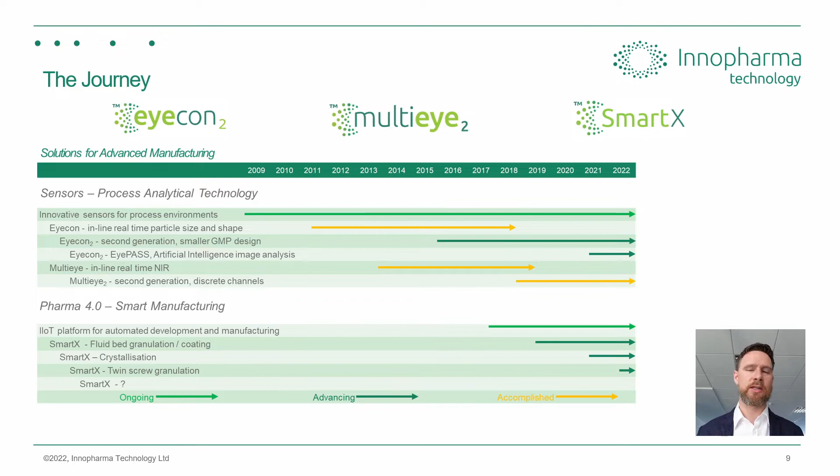So let's go back a little bit and talk about the industrial revolutions, the Viva la Revolution. So we've lived through 4 industrial revolutions. We're currently living in the 4th. The 5th is on the precipice. It's pretty much happening right now. The first industrial revolution can be attributed to things like using steam power. So having power to move objects or manufacturing lines or create goods with steam. So it was revolutionary for its time. Everything was created by hand and manual before then.

And then the second industrial revolution is attributed with things like the electric assembly line. Henry Ford has a claim to that. And also Henry Ford has a claim to bringing in the 5-day work week. So thank you for that, Henry Ford. And then the third industrial revolution, which we've lived through, is the computer era, automation with computers, etc., and bringing in that digital technology. The 4th industrial revolution is what we're living in now.

We're all familiar with a lot of pillars around Industry 4.0, such as cyber-physical systems, IIoT, interconnectivity of things really is what Industry 4.0 is all about. We're now at the precipice of Industry 5.0, which is all about sustainability and a human-centric approach to us and technology. And it's probably going to be because of Industry 5.0 that we'll live long enough to see its fruition.

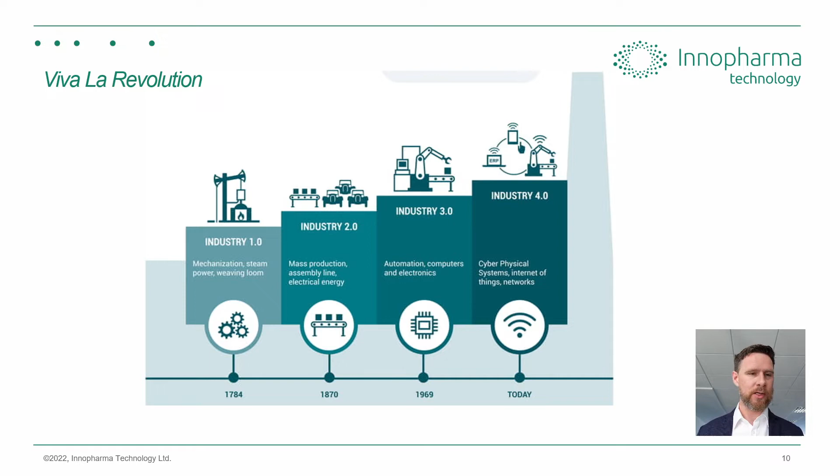And what's interesting as well about these timelines of the industrial revolutions is you'll notice here at the bottom that pretty much a Moore's law is being applied every time we have a revolution, meaning the time is getting cut in half. And that's why it's been about 50 years from the 3rd to the 4th industrial revolution, and it's only going to be about 25 years between the 4th and the 5th industrial revolution. So that's why we have the privilege of living through 3 industrial revolutions. Okay, so that's a little bit of background and color about industrial revolutions.

If we stick with Industry 4.0, which we're very heavily embedded in now, these are all pillars around what Industry 4.0 is, and I'm sure we're all familiar with what these are. Cybersecurity is in our everyday lives, automation, cloud computing is something we even take for granted now. All our devices are connected to the cloud.

Artificial intelligence, we're seeing more and more every day with things like image analysis and using machine learning, which is an umbrella under artificial intelligence. And it's all about real-time monitoring of this data and machine-to-machine communication more and more. Smart machines talking to smart machines is the idea around Industry 4.0.

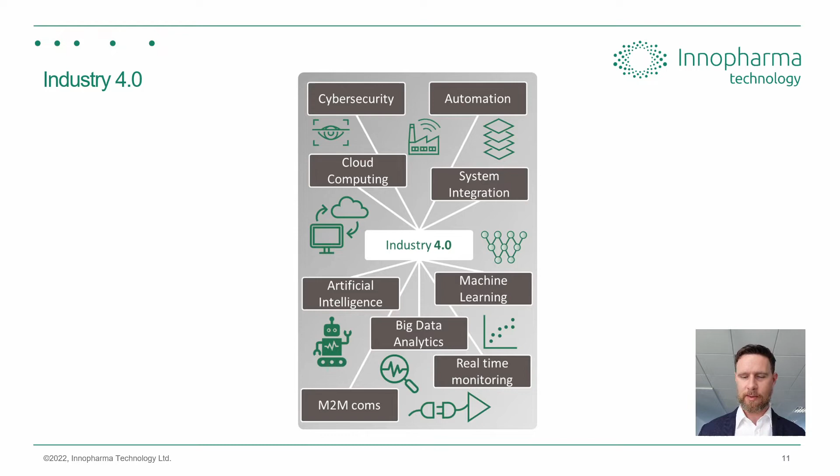So if we jump then into a bit of a regulatory perspective around what it means for the pharmaceutical industry. Pharmaceutical companies cannot sell their end products if they've not been proven to be produced correctly and conform to the standards that have been set out in their submissions. So it's fair to say that they have to reach a certain level of compliance in order to sell these products into the market.

And that's obvious for reasons of the end users being vulnerable and looking for the best products that they can get out there, and to deliver on efficacy, etc. So what that means traditionally is that I reach an X standard, I comply, brilliant, I can sell my products. But there's a lot of things pharmaceutical companies have not been taking into account along that journey, such as efficiency in their process, or making their processes smarter to learn about them. It's more recipe driven, put X in, get Y out, for example.

While the regulators around the world, the FDA and the ICH, have been trying to change this over time and bring in more standards that would give the companies the benefit of using advanced technology to learn more about their processes so they can improve on sustainability, yields, get the product to market quicker, more digitization, less paper for filing, etc. All these things have been happening for years now.

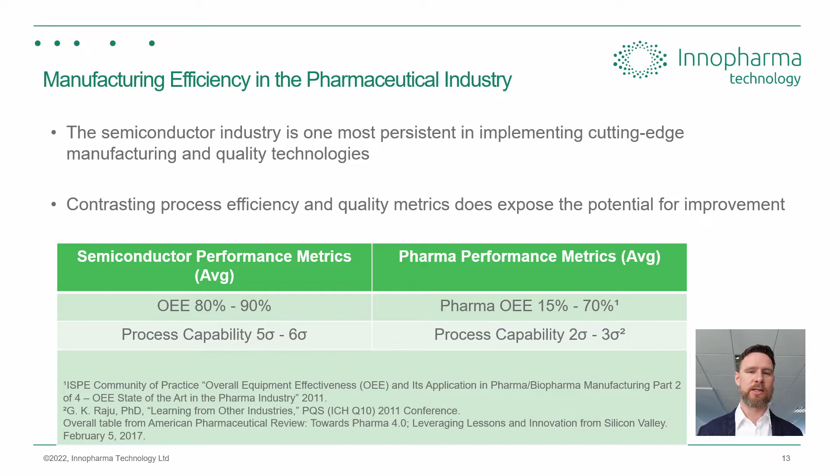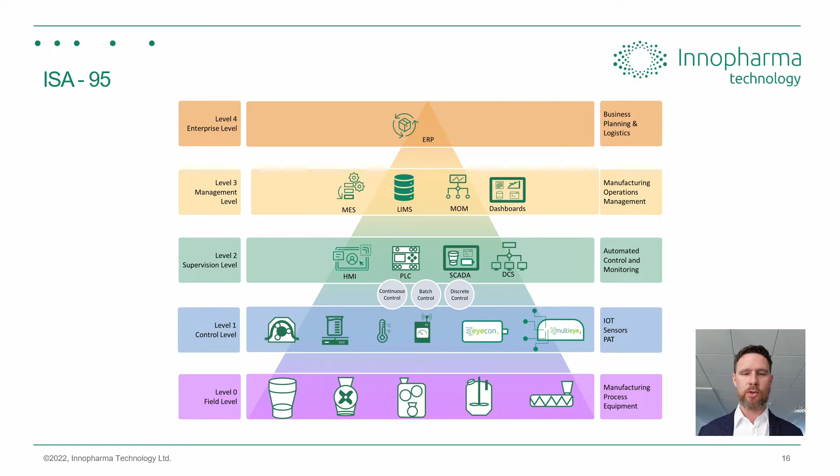Now, some would argue that this is actually a little bit outdated and things have evolved since the creation of ISA 95, and that's fair enough with Industry 4.0, Pharma 4.0, but ISA 95 is still a great reference point for working toward automation and digitalization. So that's why we show it here.

Since the operating model, ISPE has broken it out into working groups. So around the world, we have different working groups working on these different areas to bring Pharma 4.0 into the industry. So there's really good work being done by ISPE and its members.

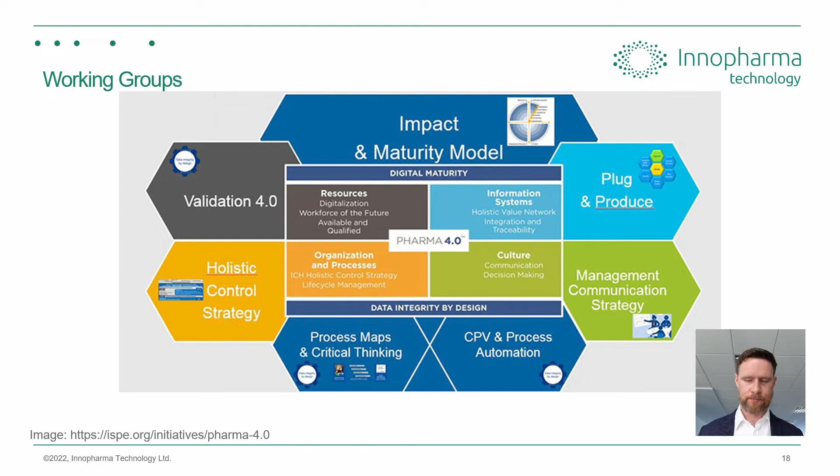and then the different components that make up SmartX and how it takes that data, manages it, and brings it up to the cloud, for example, for visualization. We have a device integration hub, meaning you can bring any sensor you want into it. We also have an advanced dynamic process controller, which is really what's allowing you to do the automation of communicating between devices, making decisions, getting feedback, and tweaking your machines to get the end product that you want.

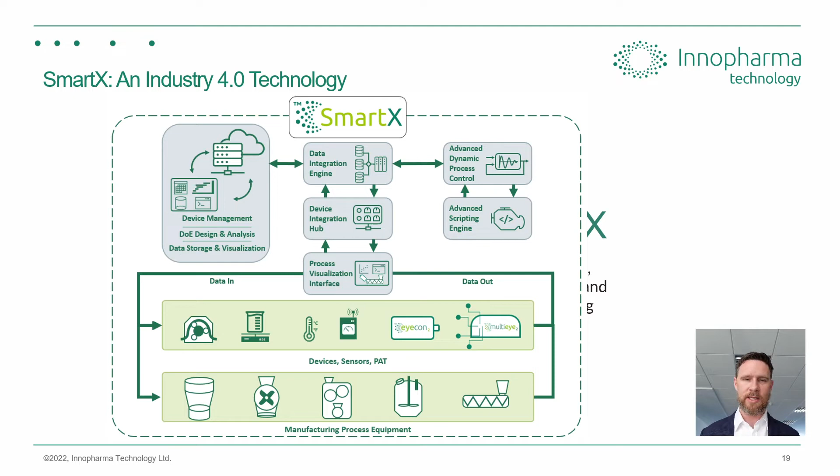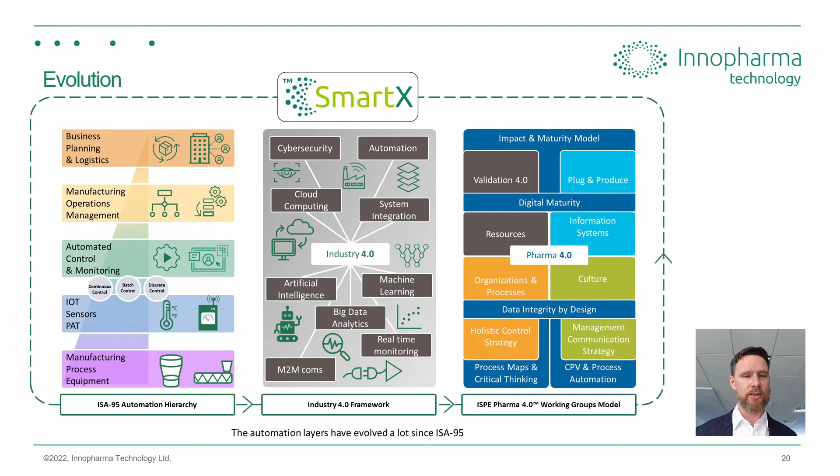So that's a breakdown really of what SmartX is and how it sits into this hierarchical needs of automation and digitization. But then if we look at SmartX again, overall, this product that we offer, how it sits into all these different areas of the ISA 95 automation, Industry 4.0 framework and all its pillars that it touches, as well as the ISPE's Pharma 4.0 working group framework and how it encompasses that as well. So basically we're saying here, it's a suitable technology that has evolved with these types of interpretations of Industry 4.0, Pharma 4.0.

So we get a little bit more granular and look into what actually SmartX is. It's basically a real-time digitization and automation platform that can be installed horizontally into your factory. And what that means really is we'll install servers either locally or remotely, so you can then communicate with your process equipment, with your PAT devices, with your sensors, and amalgamate and unify all that data. It's vendor agnostic, meaning you can bring in any sensor or data that you want.

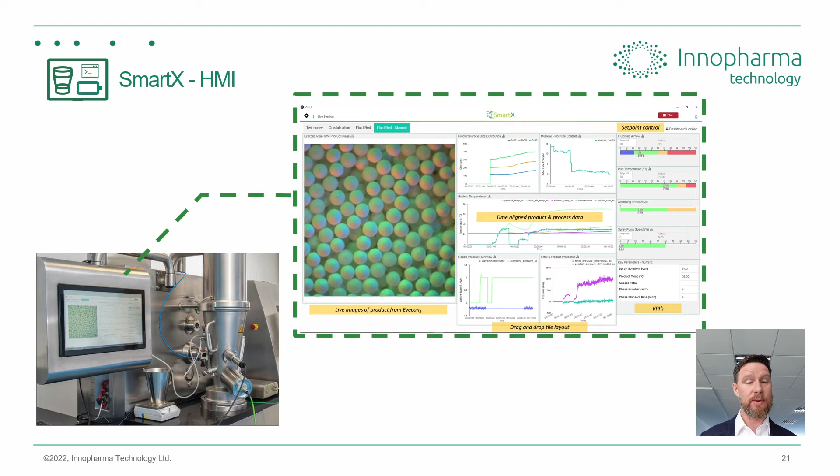But beyond that, SmartX offers things like with the cloud, you can do dashboards, and that allows you to really work as teams and make better decisions about your processes. So you can share the data with your team basically around the world. You could dial into SmartX, look at all this time-aligned data in one location, work with subject matter experts that might be at a different site or consultant, for example, and work in a Teams or Zoom fashion that we're all familiar with today to advance your process development and again get to market quicker. And that's what we're seeing here.

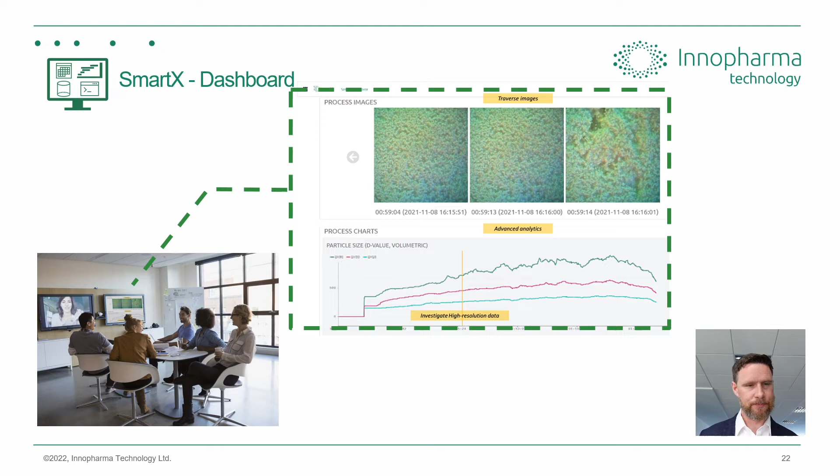Another unique aspect of SmartX is its low-code, no-code capability that's been built in. So it's been designed for the process development environment, working with process scientists who need to know how to actually control their processes, and you need not necessarily be a programmer to interact with a program like SmartX. So what we have here is a type of drag and drop bars and different process steps that can be built in so you can decide what you need to do next with your process. A type of if this then that approach to building out your automation strategy within SmartX for your piece of process equipment with all that extra data from your sensors, for example.

So essentially Pharma 4.0, it's fair to say, it's not just about running the machines and processes and monitoring it or even setting a recipe and walking away. SmartX offers you to basically monitor it as it's running, but tune it as you go as well. So it's a smart process. It's not purely just automation, set it, lights out, walk away. It's using its feedback, it's using controls, giving you more data to make better decisions, and you're tuning your process over time.

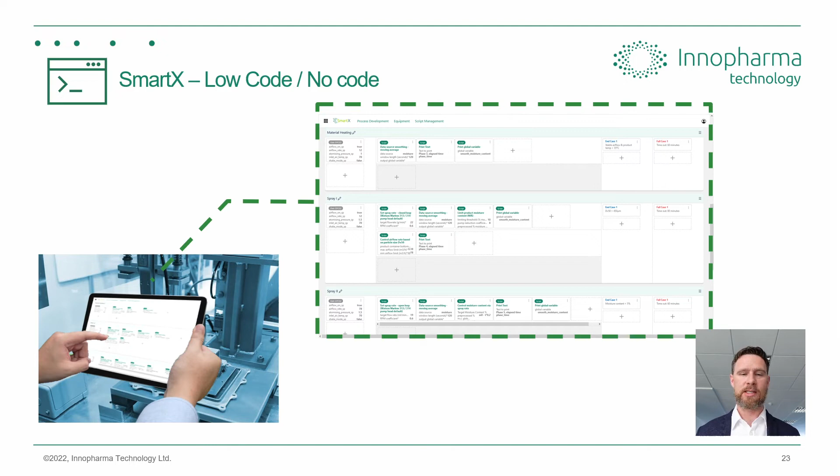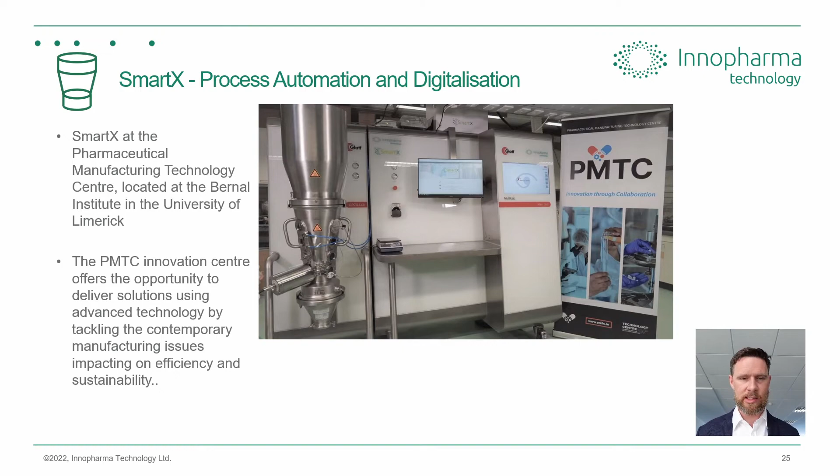This is a Glatt multi-lab machine, but what's been installed horizontally on top of it really is the SmartX, that screen you see in the middle. And it's basically allowing you to control this piece of process equipment, develop your own process steps to automate it, and using all that extra data from some of the sensors we have on this equipment: a particle size analyzer, our Eyecon 2, a MultiEye 2 for moisture content, but not just that, we also have a loss in weight balance that we installed, room temperature sensors, humidity sensors, any really third-party sensor that you want can be brought into this, as well as the process equipment's sensors and technology as well.

So this case study, we looked at fluid bed granulation, the traditional approach. I could talk about fluid bed granulation for an hour, or there's plenty of good talks out there already about it. But I think it's fair to say that the traditional approach to fluid bed in industry is it's a batch process typically. It's recipe driven typically, especially in manufacturing environments where it's basically set it, put X in, set the dials, hopefully Y comes out, test it at the end. If you conform, happy days, move on to your next process. There's little to no real-time inline measuring of any of the CQAs, critical quality attributes, and seeing what effect changing your CPPs, your critical process parameters, have on those CQAs, such as particle size, moisture, whatever your interest is in to get this product to conform.

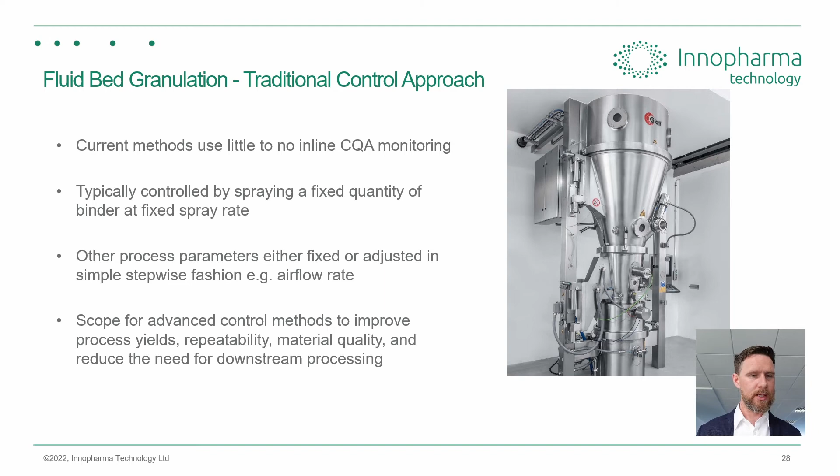So what we did, we used the Advanced Dynamic Process Control, the ADPC aspect of SmartX. That's one of the modules within it, to set all these different process phases. And these are smart process phases, meaning there's a type of if-this-then-that approach to their design. So they can't move on to the next stage unless certain criteria are met, and there's feedback control within these as well.

For example, for the very first phase, we have to preheat a bowl. You continue until your exhaust temperature reaches a certain temperature. Not the product bowl temperature itself, but the exhaust, because then you know the air coming out of it is hot and has unified the heat of all the metal it's passed through. That's one small example. All this was done with the low-code, no-code environment.

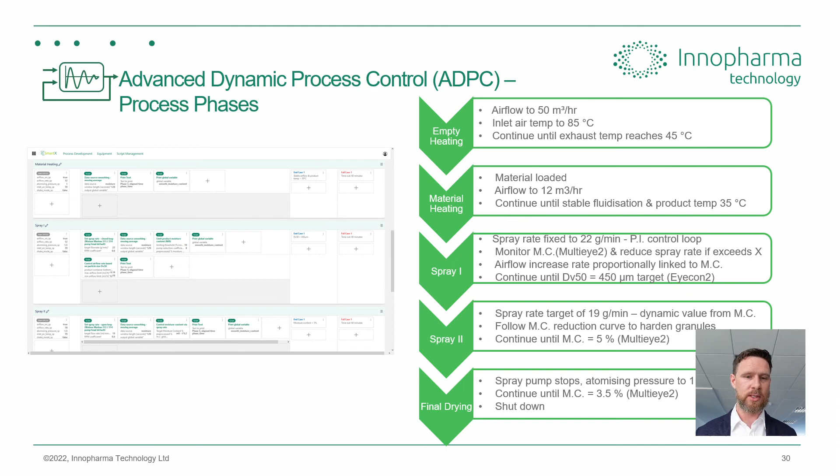We also have a scripting engine in there as well. If you want to get more, let's say, granular or dynamic, you can actually use a type of Python code to develop this out as well. But there are these aspects of low-code, no-code. So it's flexible for people's needs.

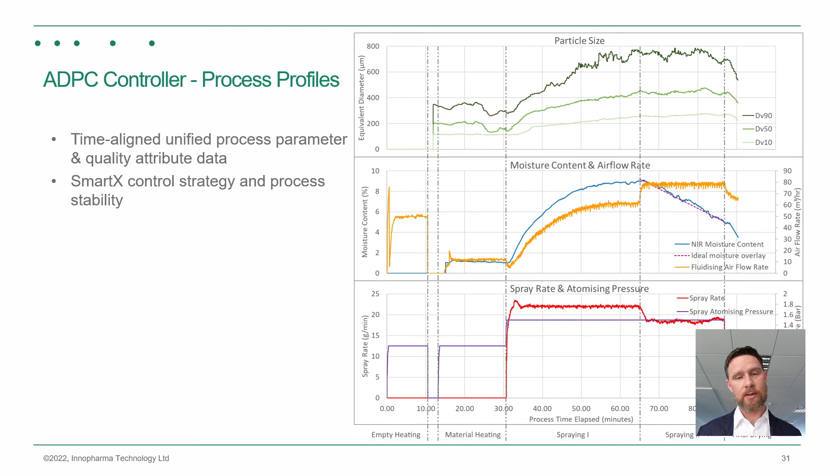If we look at the data, which is actually quite interesting, this is all the time-aligned amalgamated data in one location on the dashboards that came back from SmartX. If we look at certain parts of the data here, we can see the airflow control was dynamic. So we didn't just set the airflow to one setting and walk away. We didn't just set it to a time phase where it would constantly step up over time. It was actually based on the amount of moisture content within the fluid bed.

What that means is if the material's getting wetter inside, it's getting heavier, so it's going to need more air to fluidize it, to keep it aerated so it doesn't stick to the bottom of the bed, it doesn't cake, as the term is, and you lose your batch. And that's something that was not possible with the traditional equipment or methods of controlling the process. So with SmartX, we're able to build this in: measure the moisture content, it gets heavier, up the airflow. You can see this orange line jumping up and down, really adjusting the airflow as the material gets heavier. So that's one aspect that was pretty interesting about using SmartX for this type of process.

The other was that during spraying phase 2, we were able to use the less stable development batch to demonstrate that the active control for the spray rate during phase 2 was able to control the moisture reduction profile. What that really means is it toughened and hardened the particles without further growth, meaning we didn't grow the particles larger than we needed to, but we didn't suffer any attrition during that phase either, and made harder particles, making them conform more to the required standards.

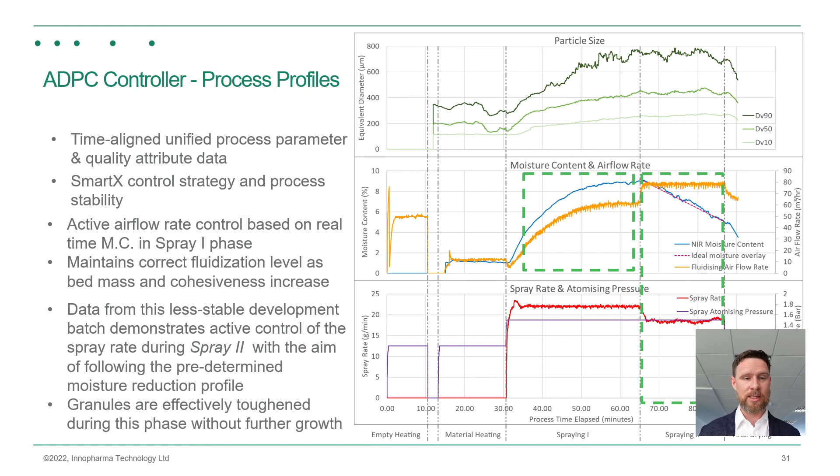So if we look at that data side by side, ADPC versus non-ADPC, basically traditional fluid bed granulation versus SmartX granulation, we can see that the particle size was much more tightly controlled, and the moisture content was much more tightly controlled by using this advanced dynamic technology. And that's just one of our case studies using this new type of digitalization automation platform, SmartX.

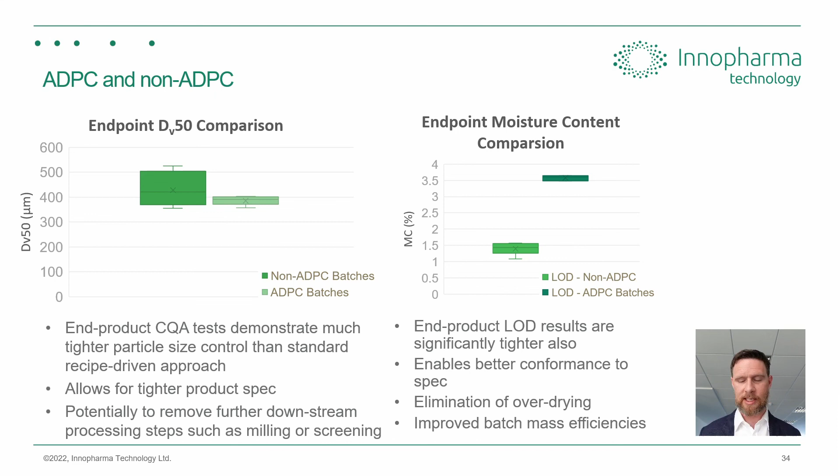So we covered a lot of ground today. I went through a lot of it quickly, but basically I wanted to conclude by saying we covered what Industry 4.0 is and its background, Pharma 4.0, its background and what it means going forward for pharmaceuticals, as well as SmartX and how it sits into those environments, and the value add it brings into process development in pharmaceuticals and Industry 4.0 in general, being a smart, connected, digital automation platform.

We did go through our case study around fluid bed granulation, and there's more about that online. And what we didn't really touch on today is Pharma 5.0, which is a whole presentation in itself, which we hope to do soon.